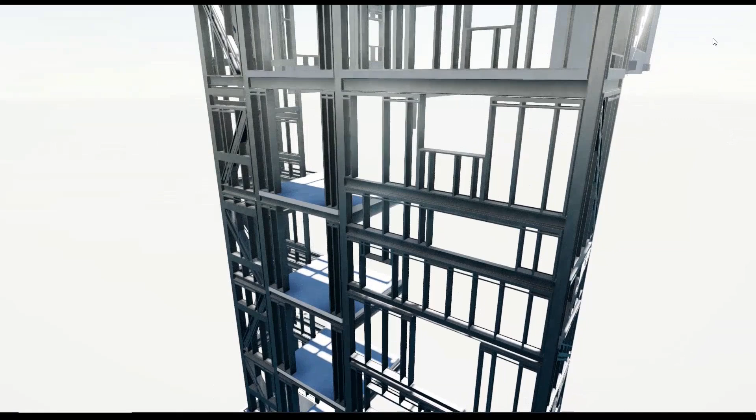This video is about Ayrshire steel framing systems. Steel framing stud panels can be used to construct walls, floors and roofs. External wall facades are fixed through a waterproof membrane, or building wrap, onto an external sheathing board. The sheathing board is fixed to the Ayrshire SFS panel.

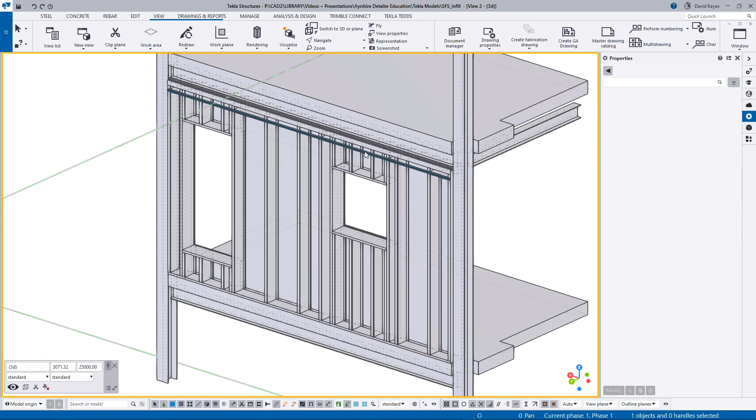The panel is made up of the base track, the wall studs, opening jambs, sills, and lintels. At the top of the panel there is a head track. If the panel isn't load-bearing, then there will be a deflection head detail that prevents live loads on the floor above from buckling the studs and damaging the wall.

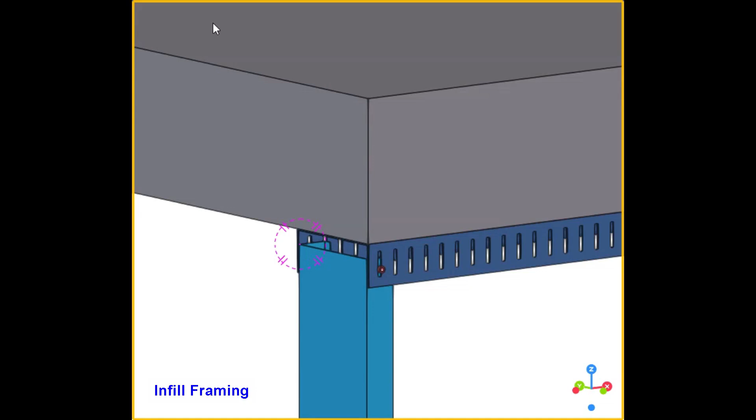The design engineer selects the type of deflection head detail to use. The slotted head track allows up to 15 mm deflection using the Ayrshire URS profile. Screws are placed in slots both sides of the stud, and allow the head track to move with the upper floor.

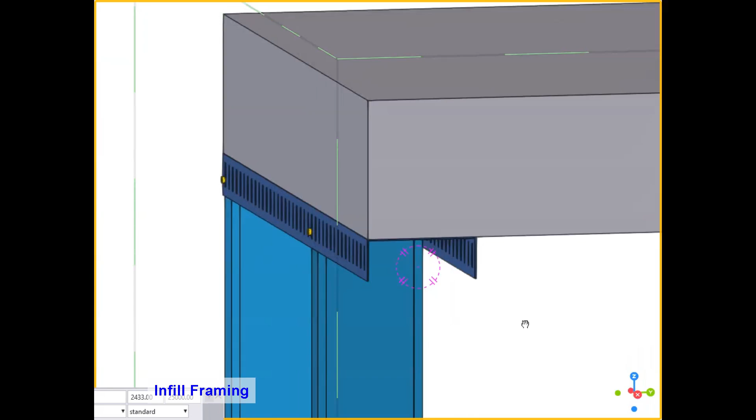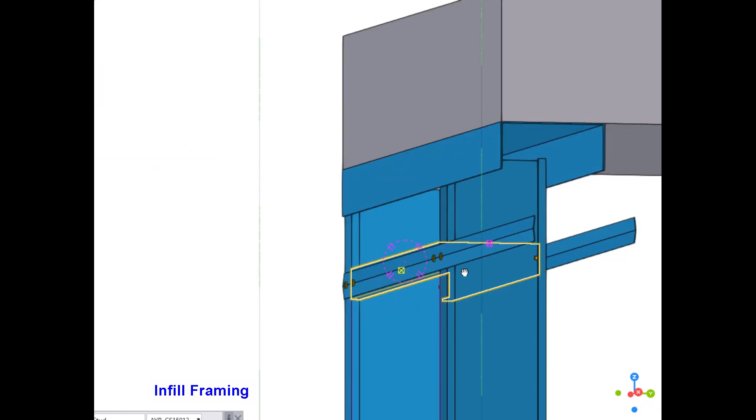Blocking and bracing allows up to 25 mm deflection. This detail uses Ayrshire's UR profile, heavy-duty track fixed to the underside of the upper floor, or hot-rolled beam. 150 mm below the head track is the blocking. These are short lengths of Ayrshire CS stud profile, cut to fit tightly between the wall studs, at every fourth gap. Blocking is held in place with Ayrshire's VB3809 profile lateral braces, on both sides. The floor and head track deflect, but the wall studs, blocking and bracing, remain static.

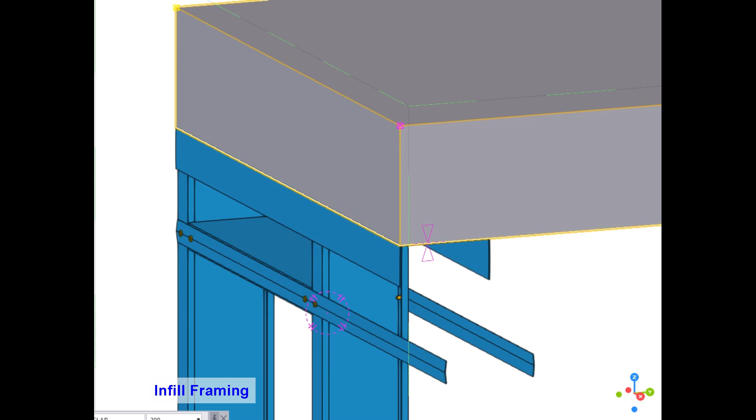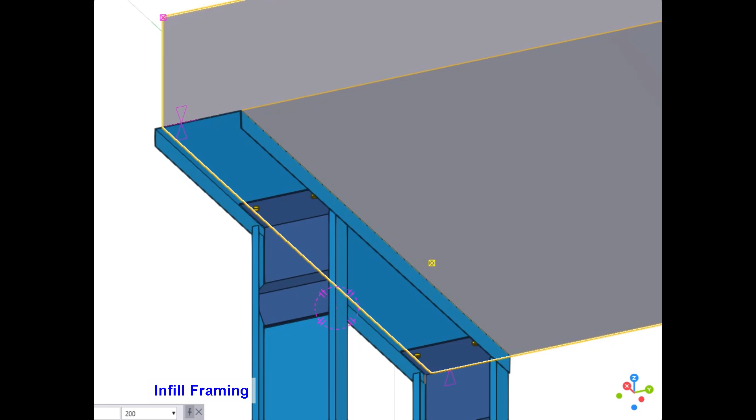Another option is Ayrshire's deflection head brackets. These are available for 100, 150 and 200 deep CS wall studs. The bracket leg is fixed through the track section, to concrete or steel above, and slides up and down inside the Ayrshire CS wall stud. Sometimes the design engineer will use deflection head brackets, without head tracks.

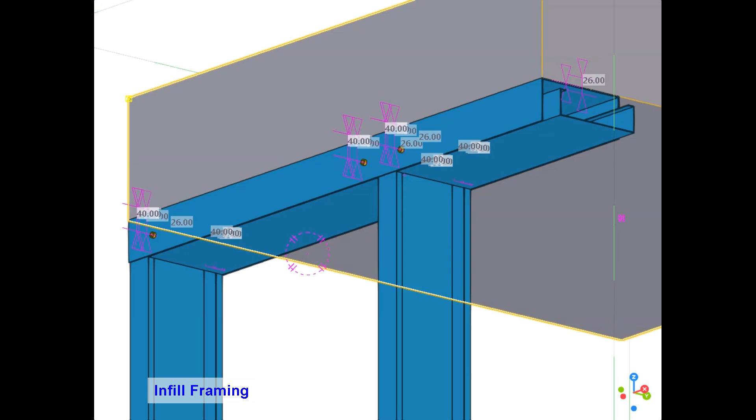Continuous head track blocking may be used in conjunction with blocking and bracing, or as local strengthening at opening jambs. This detail uses Ayrshire's heavy-duty UR track profile, fixed to the underside of the floor, or hot-rolled beam, with short lengths of Ayrshire CS profile blocking cut to fit tightly between the wall studs, and allowing the track and blocking to move with the upper floor. All of the deflection heads can be used below concrete, or hot-rolled beams.

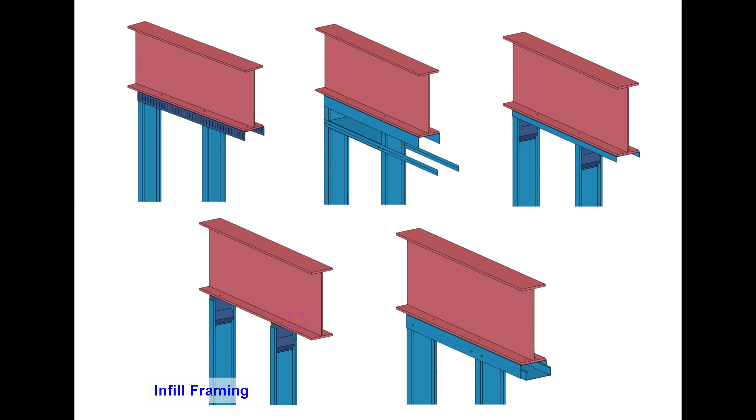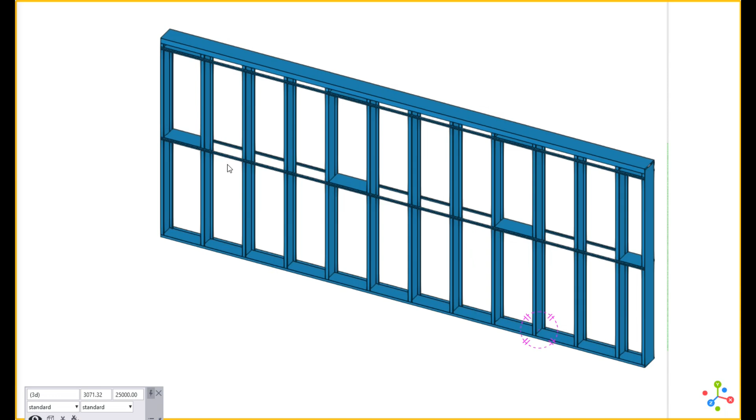If the panel is load-bearing, instead of infill, then studs are cut 3 mm below the top of the track. If the design engineer requires mid-height panel blocking and bracing, then use Ayrshire CS stud profile, cut to fit tightly between the wall studs at every fourth gap, and VB bracing both sides. Blocking pieces would also be required at both panel ends, and both sides of openings.

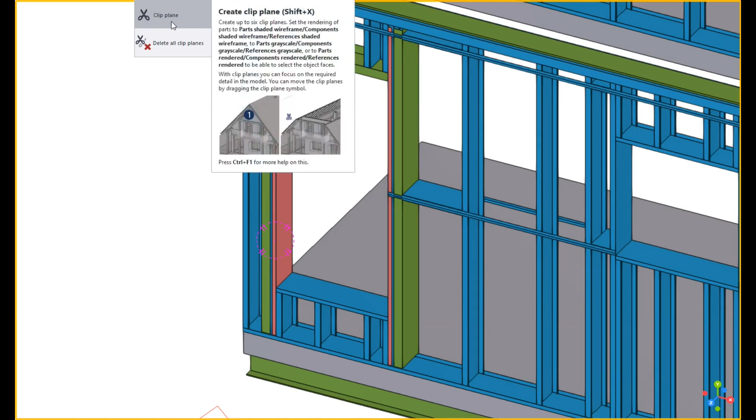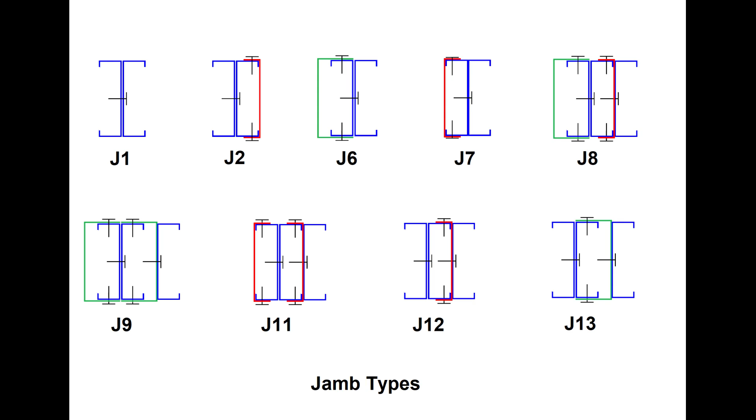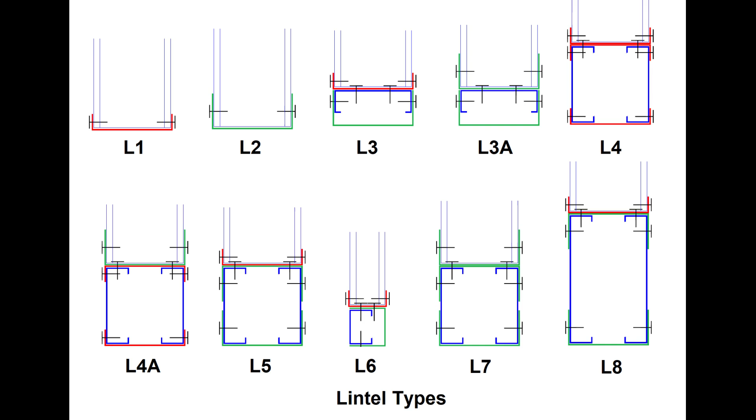Panel openings often need local strengthening at jambs, sills, and lintels. Strengthening is achieved by using stronger sections, or by nesting tracks and studs together to make compound arrangements. Ayrshire have several types of compound arrangements. These are the jambs shown in cross-section. These are the sills and the lintels. Drawings and diagrams of these standard arrangements are available from Ayrshire Technical Services.

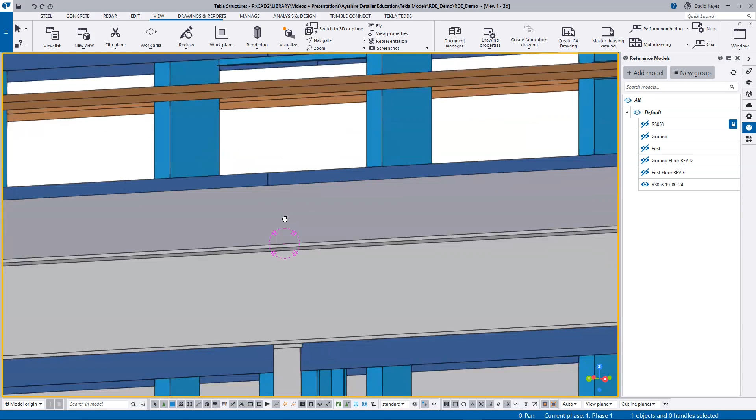Ayrshire engineers discuss the best framing and installation options with customers. New hot-rolled steel and concrete frames should be sufficiently accurate for studs to be cut to exact lengths. Some pieces, including base tracks, are supplied in standard lengths and need splicing, while some longer pieces may need to be structurally continuous or spliced. This model shows an SFS rooftop extension to an existing building. To fit inside the existing framework, the infill studs were supplied over length for site cutting.

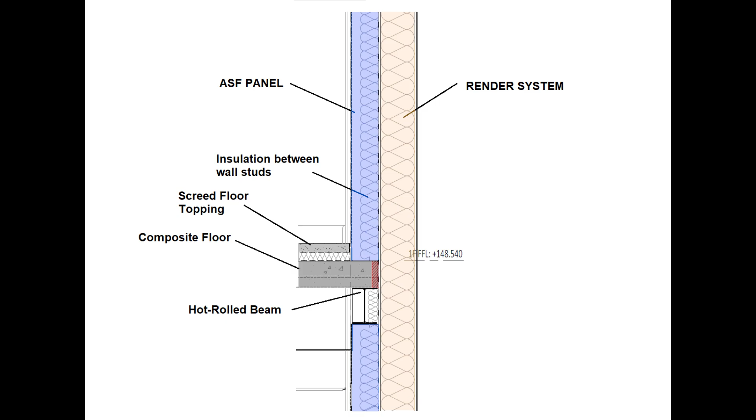Here's a quick walkthrough of the panel detailing process. The architectural floor plan and engineer's IFC model are loaded into Tekla as reference models. The ASF panel we will be adding supports the render system shown in this vertical cross-section of the wall. Note that wall panels are fixed to the top of the slab, not to the screed topping. The architectural wall elevation shows the window opening. There are dimensions showing the sill level and opening height. The Ayrshire calculation pack confirms the scope of the wall framing area. And the plan view shows the opening width.

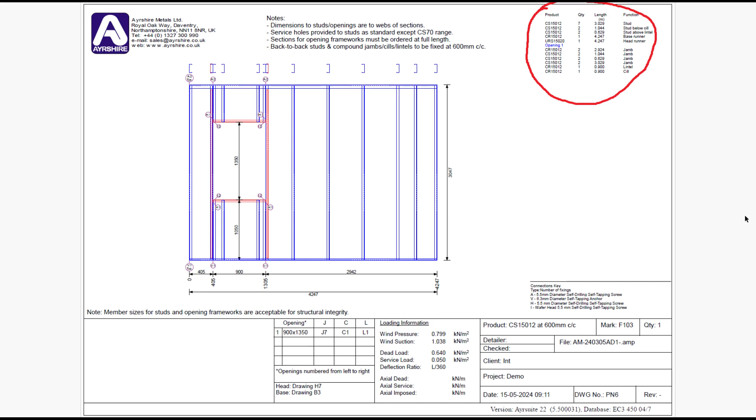The Ayrshire calculation pack includes all the panel designs for a project. And the PN6 drawing in this pack includes full details of this panel height with this opening. The wall stud profile and framing centers are shown in the title block. The opening designs are shown below the frame. Below that are references to the standard, head, and base track details. The panel edge to opening distance is only indicative. Always use the model for exact positioning. The materials list shows the profiles, quantities, and lengths needed to build this instance of the panel, but always use the model for exact quantities.

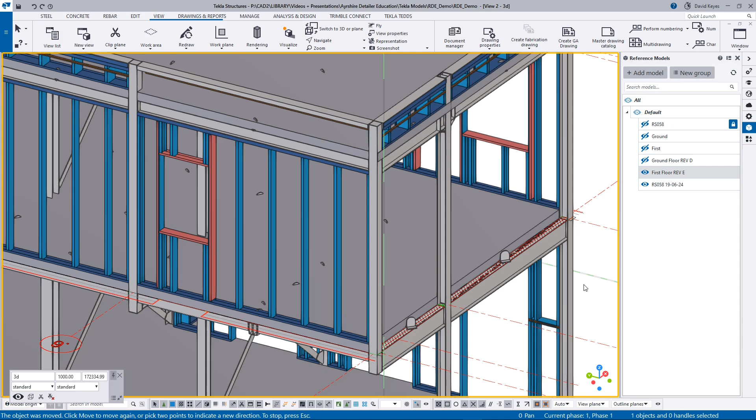Fixing details for the head track, base track, lintel, sill and jambs are available from Ayrsuite. Add the panel frame, then the opening framework, and then the infill studs. If panel fabrication is off-site, then it's okay to make the panel into an assembly, although this complicates piece marking, and generally should be avoided.

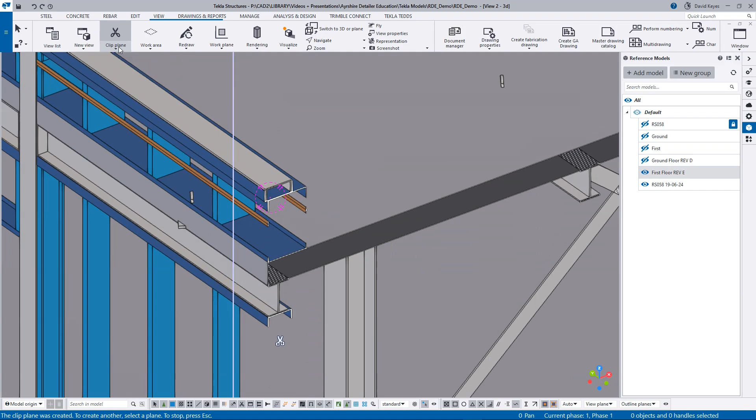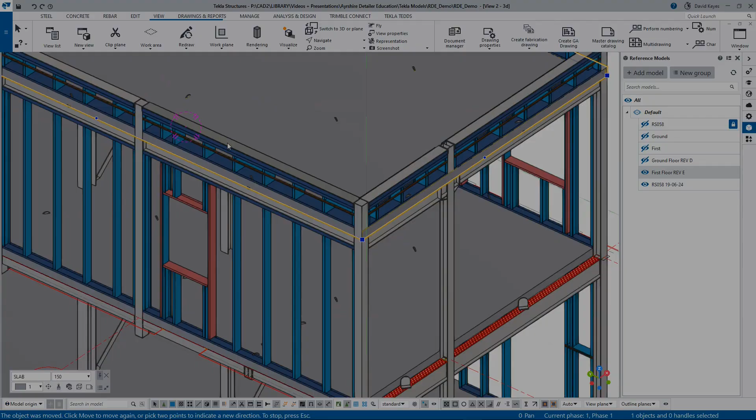The parapet in this example fits between the roof slab and a PFC 180 top rail. Ayrshire custom pressed track is used to cap the underside of the PFC and provide a flat face for head track fixing. The parapet uses the blocking and bracing deflection head detail. This requires the head and base tracks, the studs, blocking and bracing, and the custom pressed track. General arrangement drawings are prepared and submitted for approval.

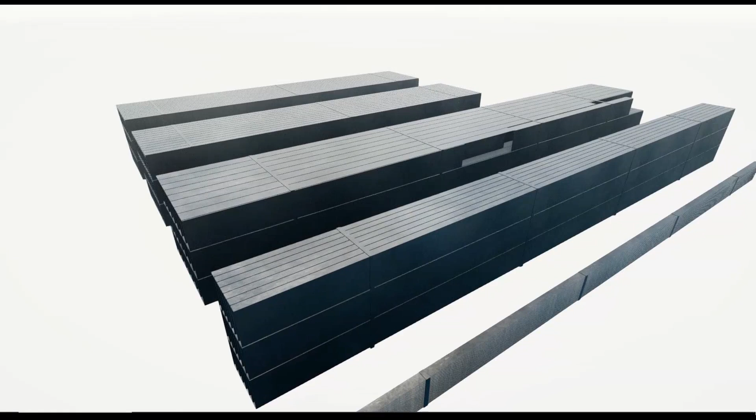When steel is delivered to a job site, it is bundled by section type, not by the parts that would make up a specific panel. Generally, very short lengths are cut to fit on site because they either need to be site fitted, or are so short that it's impractical to include them in bundles. Ayrshire Technical Services provide the design work, construction details, and installation advice.